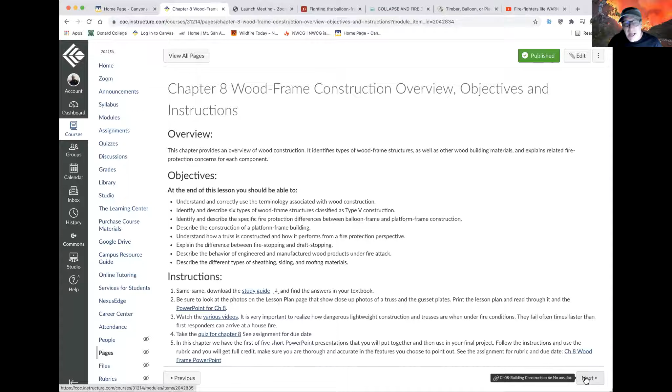So here, I'll just go through it real quick. Here's the objectives and instructions. There are a lot. I know sometimes you guys hesitate to watch the videos, but they're really informative and will help you understand this subject. So I highly recommend watching the videos.

So there's your instructions, make sure to check that out. Here's your questions. And then I've got 3 PDFs that I put in. And I wanted you to see this one especially, and I'm gonna bring it up a different way in just a sec. Well, you know what, it's probably just fine here.

So this table is based—there's a similar table in the building code—and it explains what's involved in the 5 different types of construction. And by the way, they all have 2 subtypes, except for type 4, which does not have a second subtype, and type 2, I'm sorry, has a 3rd subtype.

I didn't know that. Oh, I see, that's NFPA, according to NFPA. But in the building code, I think type 1 has 2 types, type 2 has 2 types, type 3 has 2 types, type 4—and then type 5 has 2 types. So what makes a type 5, a type 4, a type 3, a type 2, a type 1?

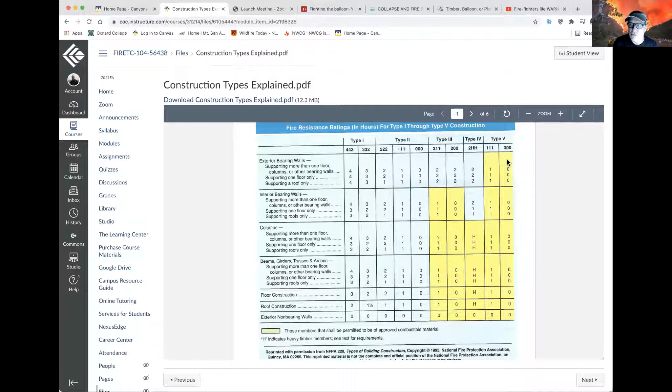So what does it mean when it's a 1-hour rated wall or a 2-hour rated wall? What do you think? There's a lot of crickets out there. Well, I'll tell you—are you still alive? Can you hear me? Yes, yes sir, okay. I just wanted to know you're all still there, I'm not hearing anything.

A 1-hour rated wall really won't hold back a fire for 1 hour, but it's a rating that's supposed to act like it would hold it back an hour. So a 20-minute door is supposed to take 20 minutes for fire to burn through it. A 1-hour wall is supposed to take an hour to penetrate through, but it's less than that. It's kind of like a 2x4—there are no true 2x4s out there except really old ones, they're all less than 2x4, but they're still called a 2x4.

So a 1-hour rating is supposed to slow a fire down at 1 hour. A 2-hour rating is supposed to take 2 hours to penetrate through the wall, and 3 or 4 hours similarly. So a 4-hour rated wall is usually steel encased in concrete, or concrete alone.

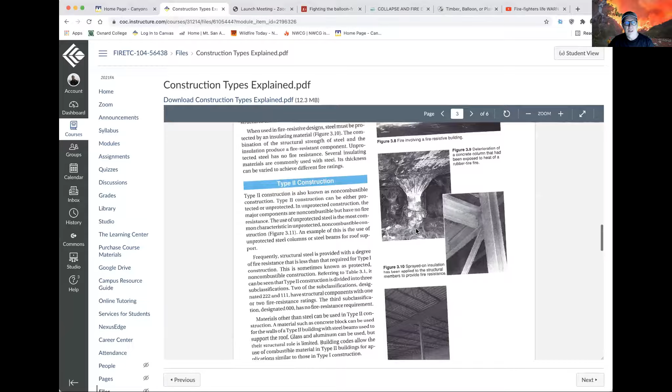Yeah, so here's some pictures. This is steel, and there's a sprayed-on insulation, can you see that? So here there was this great fire, but look, the building is still in pretty good shape. It's fire resistive, so it's charred from the smoke, but the building is fine. All the furniture is a disaster.

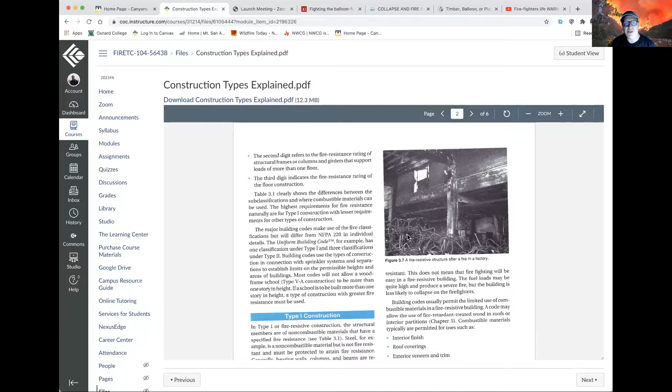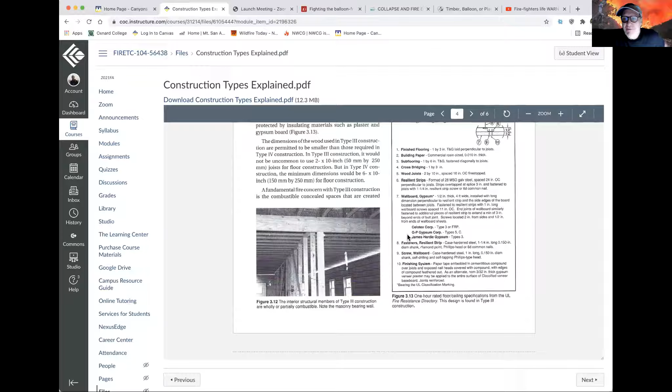The First Interstate fire was one that burned pretty wild and crazy in downtown LA. Minimal damage to the building—it was all contents that were burning. Whereas type 5, which we're going to talk about tonight, is the exact opposite.

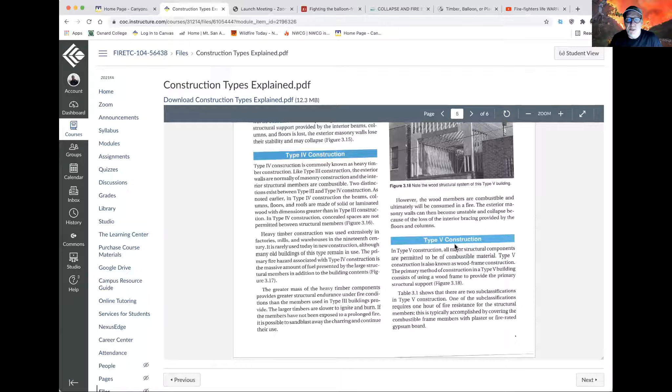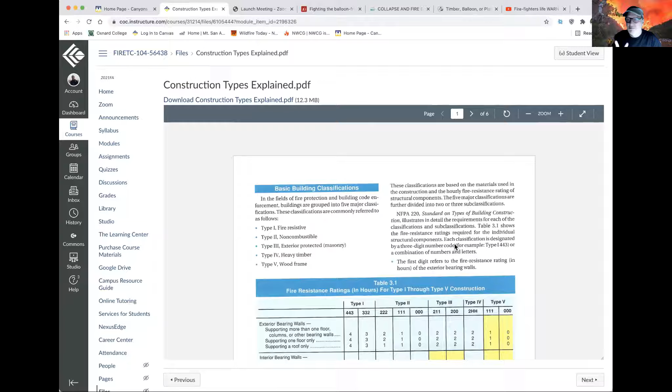Okay, so I want you to read through this, these descriptions here, similar to what you get in the book, but very simple and to the point. That's one of the reasons why I put this here—in 6 pages, very easily, all 5 types just explained. Okay, oops, I didn't have to do that.

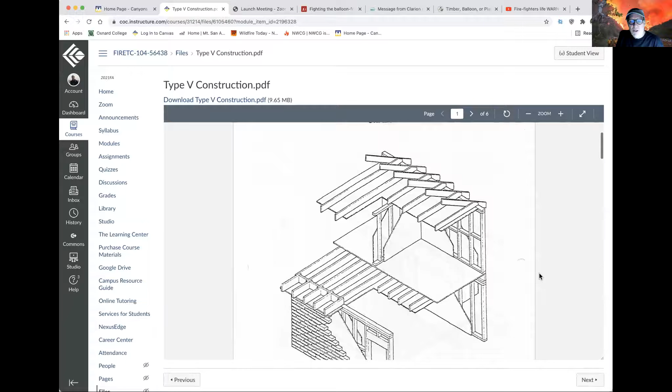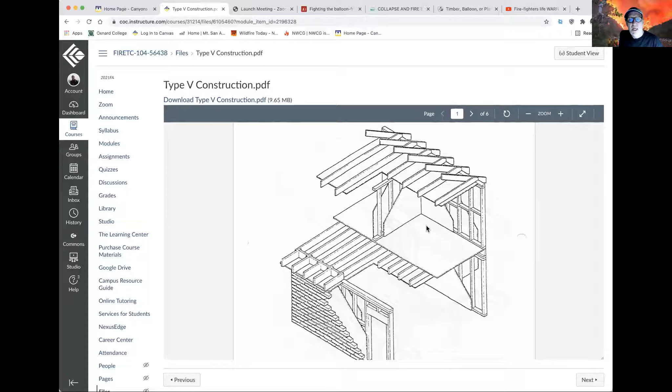Then this other one I want you to look through is about type 5 construction. So today and this week, you're learning about wood frame construction, type 5. Most of us—there might be a few exceptions out there. Some of you maybe live in apartments that are type 3, or you might live in something, though I highly doubt it, that's type 1 or 2, unless it's high rise, and we don't have any high rise in Santa Clarita. Most of your homes are a version of type 5.

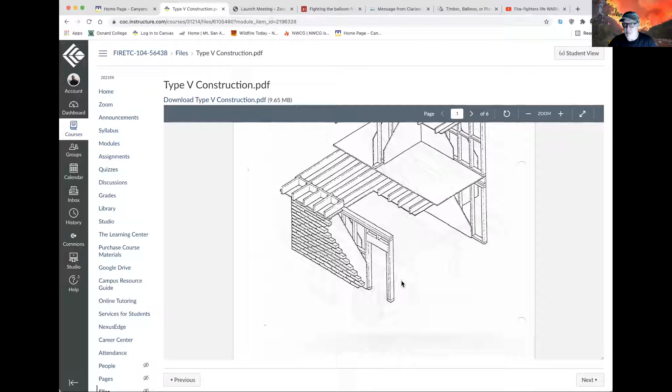This is a very typical drawing. This is a platform style construction, type 5, which means it's predominantly wood. Now sometimes, and they deliberately included this picture, you'll pull up on a type 5 building but it looks like it's a brick building. There are a lot of homes here in Santa Clarita, especially some of the bigger, higher dollar homes, that have a brick or rock look to them. But this is a facade—it's not really the structure. You can see here there's some kind of gypboard in between, and the brick is just there for looks, it does not hold the building up. If the exterior of the building really was brick, it would be type 3.

They get confused, and it's really important that we know the difference between type 3 and type 5. As we look at the 5 types over the next 5 weeks, one of the things I want you to learn is, what's the hazard? Because there's pros and cons to every type.

It's just like I mentioned with truss. Trusses are used a lot in type 5. The truss for roofs or floors, they are used for a very logical reason. They're inexpensive and they're light, way lighter than using heavy timber. So there's a positive to that, right? Our homes would cost a ton more if they didn't use trusses.

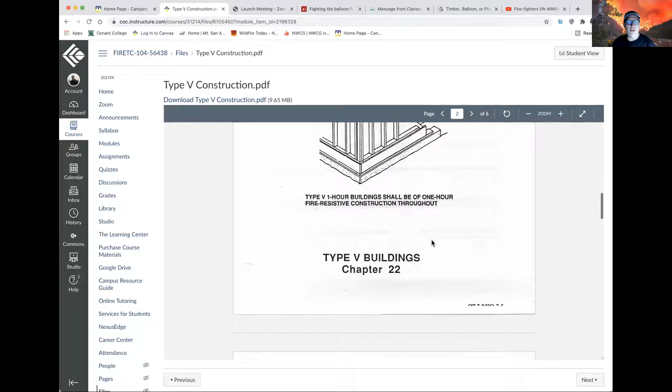But the problem with trusses is that they fail very early in a fire because of how short the gusset plates are. Did we talk about that yet? Anybody know? Did I talk about trusses and gusset plates? Yes, sir. I thought so. I have some pictures in here that you'll see of how short these gusset plates are. They're like a 1/2 to 3/4 inch. And then imagine a nail that's only just 1/2 inch. Are you going to put a lot of confidence in that?

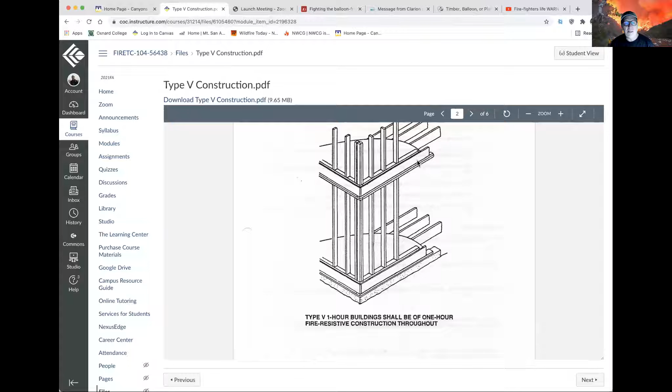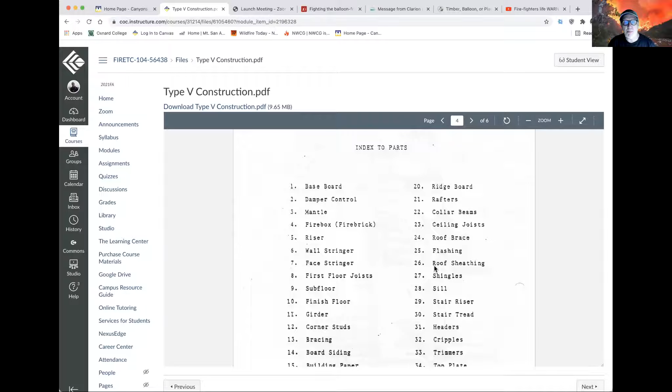No, not really. So here's another illustration of type 5. Here's the joists of a floor and sill plate and the basic framed structure. This illustration gives you all of the terminology in a wood frame construction house. Here's the list of the parts that correspond with these numbers, okay? So that will help you if you're reading and you're going, what the heck is a tread on a stair? Or what's the stringer? You can find that out.

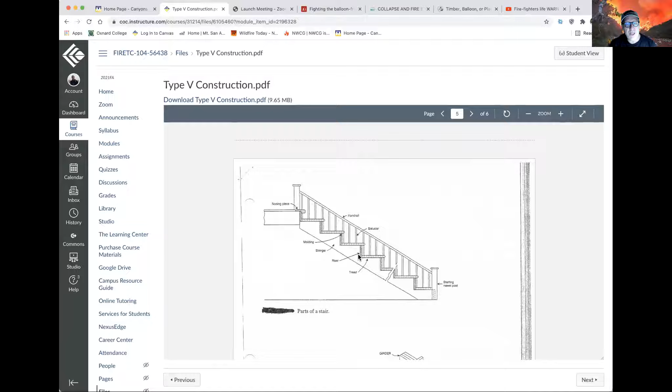And here's another illustration because stairs are so important. Stair failure kills people. Stairs is a really frightening part. We do not allow in any commercial setting to store anything under a stairwell because of fire spread. So this gives you all the names: the newel post, the balusters, the handrail, the tread, the riser, and then the stringer. Parts of a stair, this is the opening of a stair, has to be built correctly where it's going to pop out into the second floor. You put a lot of confidence when you're walking upstairs, and having one collapse would be really bad.

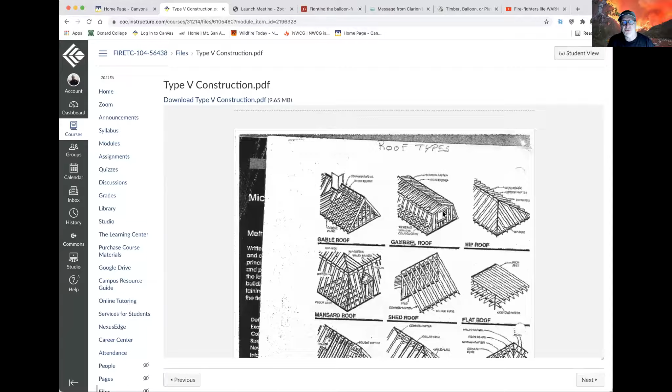The last one is roof types. Now there is an extra credit assignment - you can go straight to assignments and find it. If you see some of these different roof types, take a selfie of yourself with that roof in the background, upload it, and say, I found a gambrel roof, or I found a mansard roof, or I found a shed roof. These are all different roof types. And in fact, there's an even better illustration in this next PDF, and I like that it's color, it's a little easier to tell.

Pyramid type hip roof. One of the ones they don't have in here, but I think I've got it somewhere else, is Sawtooth. Sawtooth is rarely used anymore, but it used to be used. There is one here in town at Cal Arts. It was used in big warehouses. The roof would go up and then straight down, up and then straight down, up and then straight down, so it had this look of an upside down saw.

The part that went straight up and down had lots of windows, and so it was a way of adding light into buildings. Also, they could open the windows and it helped with ventilation pre-air conditioning. So there's one of these Sawtooth roofs off the 5 near County General Hospital. So when somebody else is driving, you can look and see if you can find that Sawtooth roof - they're very rare to see. But like I said, there's one at Cal Arts. You can go over there and see if they'll let you in. They won't, but okay.

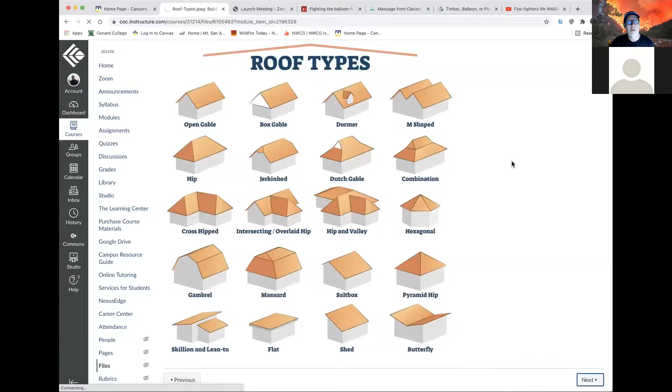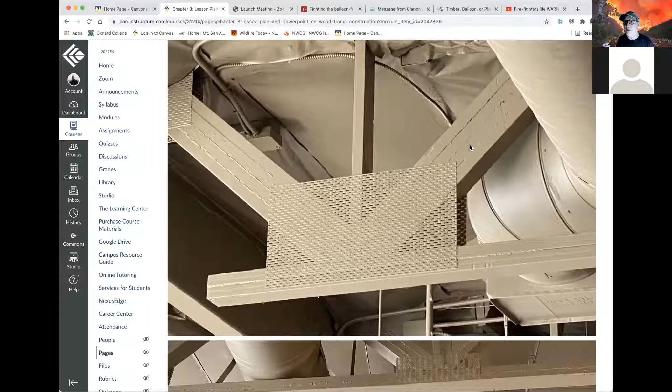And then here's the pictures of the trusses. This is called a gusset plate, and these are trusses, and they're often used for floors and for roofs. So this one was part of, it's a flat roof, and it was part of the roof structure.

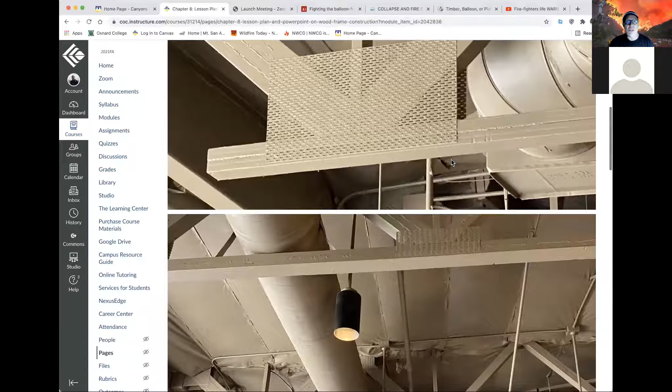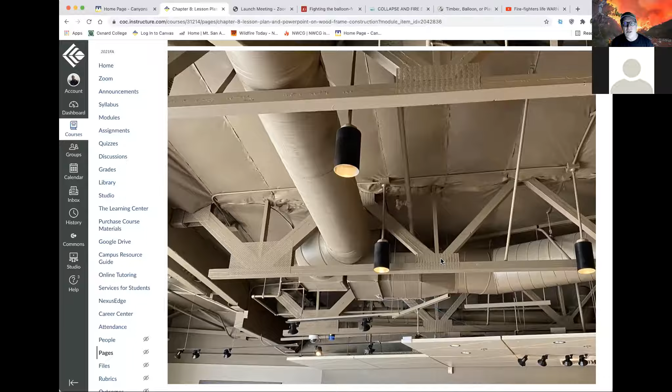And you can see how big this gusset plate was because these were big members. And then some of these other gusset plates aren't as big. See, here's that big one in the distance, and here's the others. So bigger beams, bigger members, bigger gusset plates.

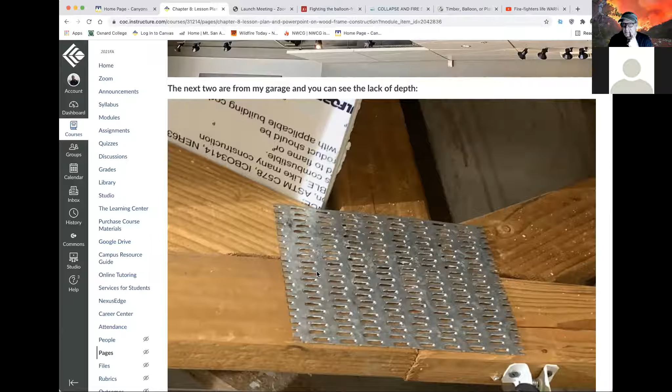So I wanted to get a close-up of a gusset plate and wanted you to be able to see that. So this is in my garage. And so you've got 1, 2, 3, 4, 5 members that are being joined by this simple gusset plate. And I think there's one on both sides. I'm not 100% sure, I'd have to go back out there and look. But I took this picture.

Yeah, see, it's on both sides. Because here you can see this is what holds it to the wood. And you can see it's a ½ inch, maybe 3/4 max.

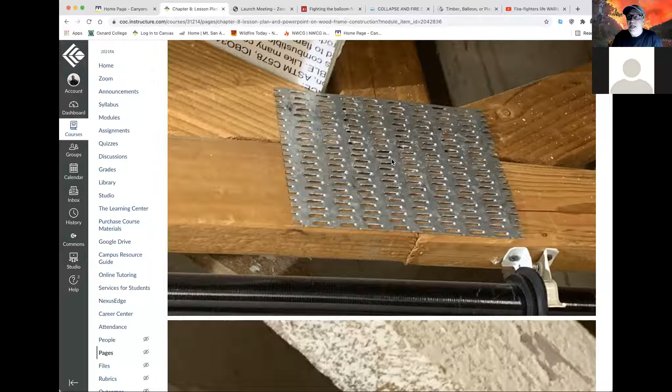And those bite into the wood and hold it together. Now that's adequate as long as it's not exposed to heat. If you have fire in here, this baby's gonna heat up, and through conduction, it's gonna transfer that heat into the wood and it'll char. And this is usually where we get failure, where there's gusset plates, okay?

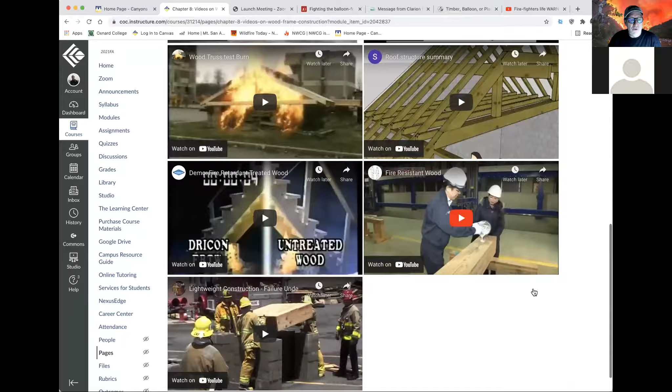So those were the things I wanted to show you in the module. Here's some of these great videos, a lot of really good informative videos. This one's a little old school, but very good information.

This one's about roof structure, but this one's pretty interesting. And it's a wood truss test burn. A little unrealistic because it's outside. You're getting more oxygen, but on the other hand, the heat isn't being totally held inside. So maybe a little bit off on how fast, but it goes in about 5-6 minutes.

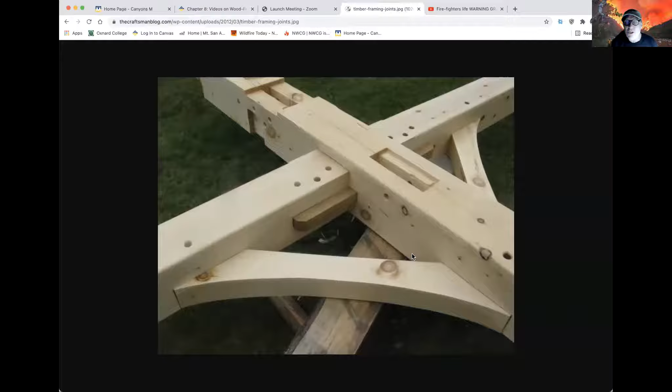Okay, that's enough of that one. I just wanted to show you some good stuff. So here's 3 different photos. Well, I think I can make that bigger. Yeah, look at that. So this is timber frame, used a lot in old barns, but it's kind of made a comeback. People are wanting to get that old organic look to a home, very earthy. So in timber frame, the walls are just kind of hung on the frame.

And so they have what they call bents, and this is part of a bent. A bent would be, if you look down the long part of the building, you'd have bents spaced throughout going the width. So the bents are the main structural members, and they're usually heavy beams like this.

In the old barns that are using old growth logs, a lot of them still have been hewed. You can still see where they were hand hewed with axes or those like mattocks, things, I forget what they're called. They would do this by hand back in the old days.

We have machines to cut tenon holes and to help you cut tenons. So this is where a tenon will slip in there, and then see this little hole — I just used the wrong term. The thing that slips in is different. The tenon is the little rod that goes in there, I think. I forget, my terminology just got a little messed up. But these, so they put the little tenons in, post and tenon, and I can't remember that third word.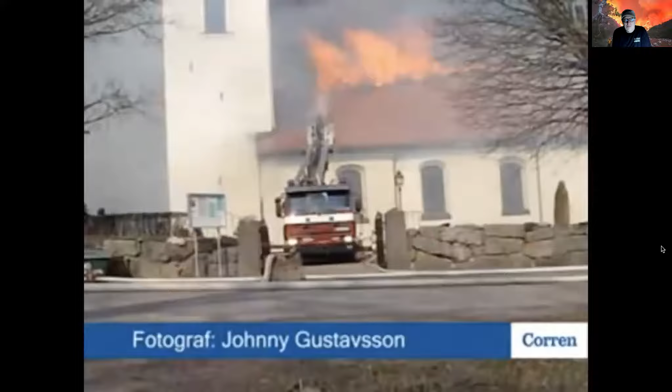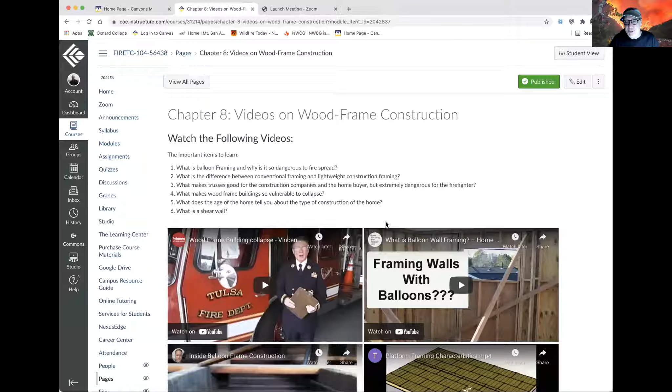So some of those different building collapse during a fire. Scary deal, right?

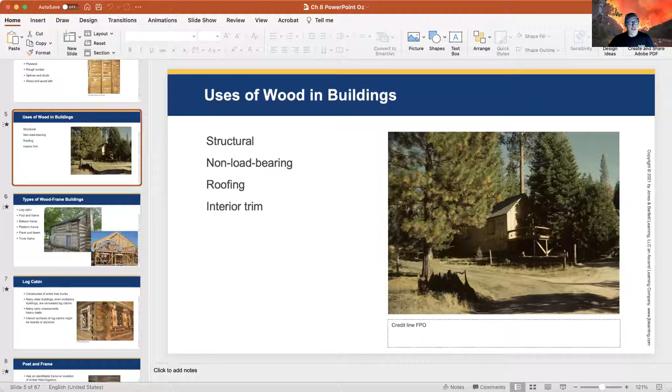So there's different kinds of ways we make wood frame buildings. And I said there's 3 basic, but there are a few more categories.

Well, there's the old log cabin. We don't see too many of those around here. There's a few in some historical sites, but back east you do still see them. People live in log cabins. And as I was saying earlier, they've kind of become a hip thing to rebuild with modern conveniences. This one's in pretty good shape, actually.

But I want you to notice something. Have any of you taken fire prevention with me? I am teaching it during the winter session. If you haven't taken 102, I think you would like that class. Though in winter session, it's a blitz, it's even more intense than summer school.

So look at this, a wood chimney. They cake it with mud or some kind of material inside, like chinking, and they have to keep doing it because it gets brittle and breaks off. Wood chimney fires were very common. A lot of times when I tell people they used to make chimneys out of wood, they're like, are you kidding me? Come on, you're pulling my leg.

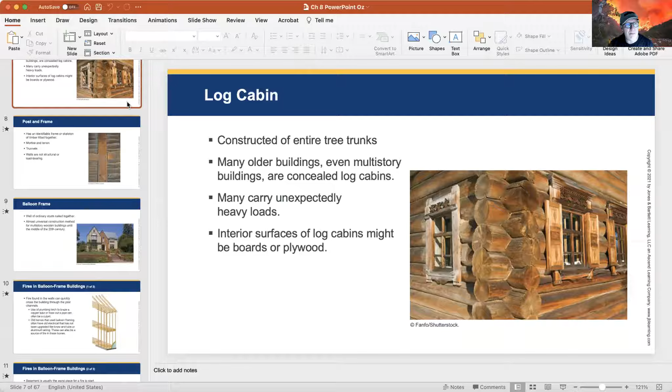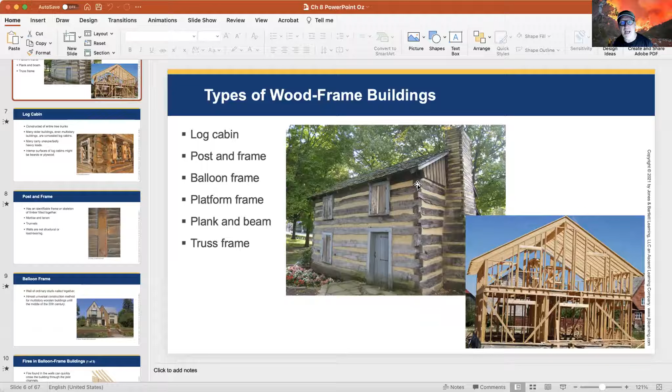So log cabins, like I said, not real common anymore, but they were used, all these joints, they would join them together and then chink them. This kind of log cabin, like the old Lincoln logs, very uncommon. More often you have something more like this. All of these cuts are made to repel water so that the wood doesn't decay at the corners.

So post and frame has a very identifiable frame and skeleton using the mortise and tenon I was talking about earlier. The other word I couldn't remember is trunnels, that go into the mortise and tenon. Walls are not structural, they are not load bearing. The bents are the structure, and everything just kind of hangs on them.

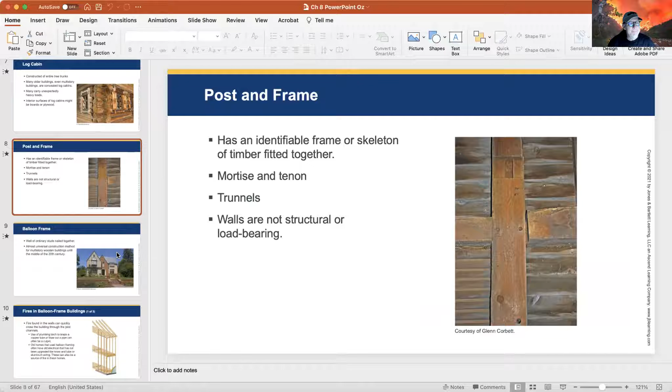But they also, a lot of them have knob and tube or aluminum electrical. And if they have not been updated, these kind of houses, people buy them all the time thinking, oh that's so cool, we're going to redo it and have this wonderful old house, it's a Victorian or whatever. And they don't realize they're buying into a nightmare, because usually, if it hasn't been done already, you have to change all the electrical, all the plumbing.

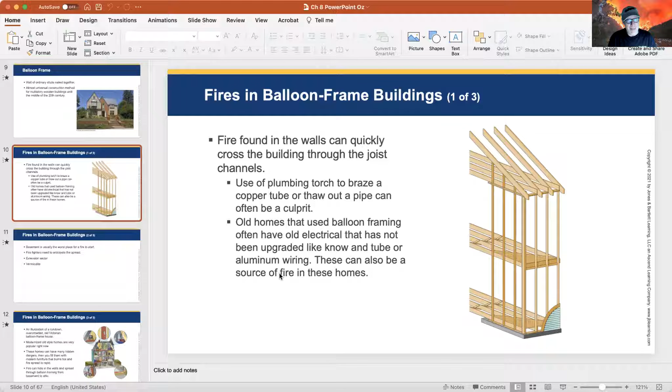So fires happen quite often in balloon frame and have rapid spread. That's the thing firefighters want to be thinking about with balloon frame. They're usually pretty structurally sound, but they have rapid fire spread in the walls and the floors.

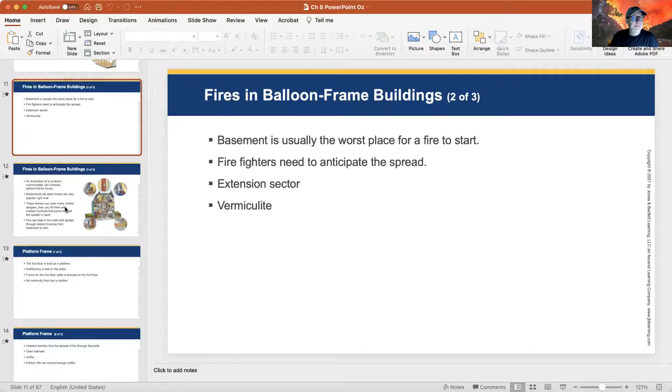We get all these modernized old style homes, Victorians, very popular, but they can have all sorts of hidden dangers. Back east, they have radiators. Where you have radiators, you have to have a boiler. Boilers can be a problem. You have issues in the walls. Oh, and by the way, if the rats get in the walls, they can travel the whole house. They just love it. It's like a highway for them.

But here's the deal. What's inside, when we modernize them, we put all of this really highly flammable furniture that burns extremely hot. So all of those things, when we modernize these old homes, if we don't add the fire stopping, if we don't change the electrical, change the plumbing, and be careful of hidden fire dangers, then it can be a nightmare.

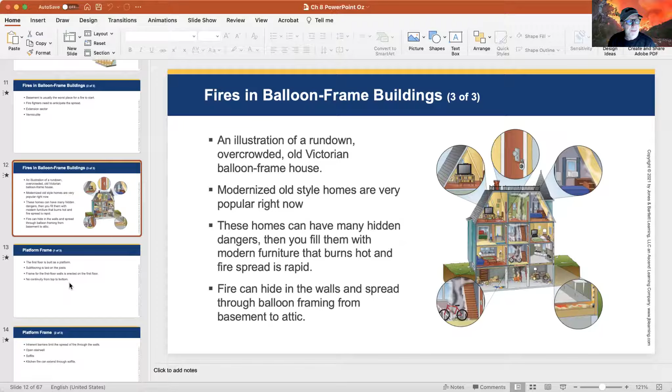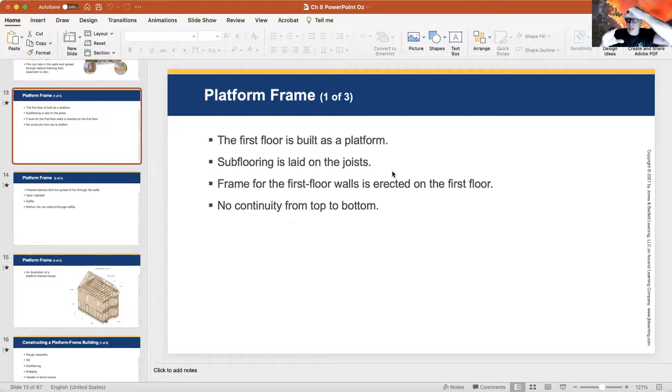Platform frame is what we have a lot today. First floor is built like a platform, then you have subflooring, and then you frame above that on the first floor. And there is no continuity from top to bottom. Each floor is like a box put on a box. And that's kind of good. There's some good things to that. There are some inherent barriers to limit the spread of the fire.

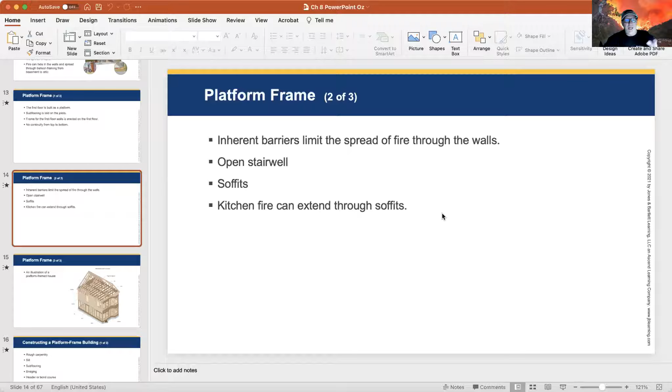But if they are multi-story, they usually have open stairwells to deal with, depending on how they've made the floors. If now in modern homes, they're using the trusses, there's plenty of room to get your utilities through them. But if not, a lot of times they'll have these soffits and spaces where you can run plumbing or ductwork and things like that through. And sometimes those can offer fire spread vertically, laterally, or horizontally.

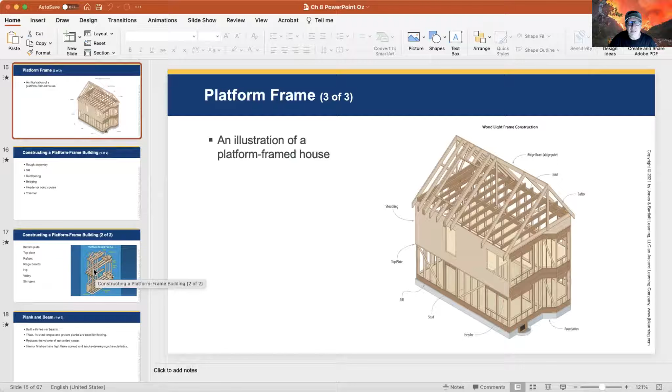So here's an illustration of a platform framed house. See how it's kind of just a box on top of a box, and even the roof is just like another box put on top of the box. It is an efficient way of building a home, and it's more cost effective. However, now with truss frame, it's added a dimension that makes it a little more dangerous for us, a lot more.

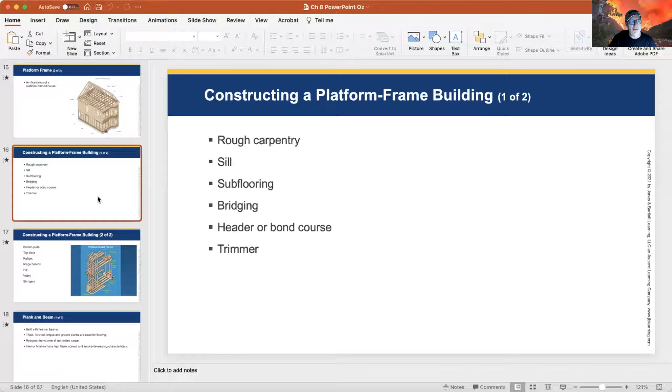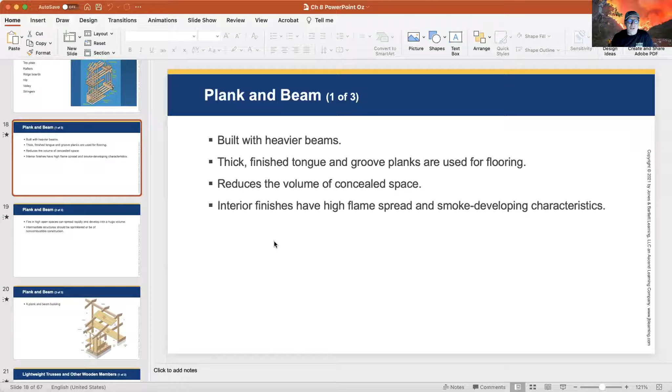So you can look at all of that later. Plank and beam is built with the heavier beams, thick finished tongue and groove planks for the flooring, and it reduces, so you don't have like a space in between the roof or the ceiling and the next floor, but they'll use those planks, which serves as a pretty ceiling and a pretty floor. So it reduces the volume of those concealed spaces, but you can have other issues. Plank and beam, again, is kind of expensive.

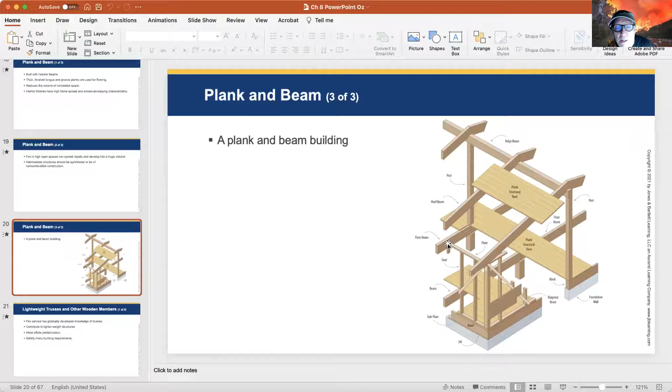So here's an illustration of plank and beam. Beams, a post, roof beam. Again, take your time, look through this, and the book will explain it in better detail than I'm doing.

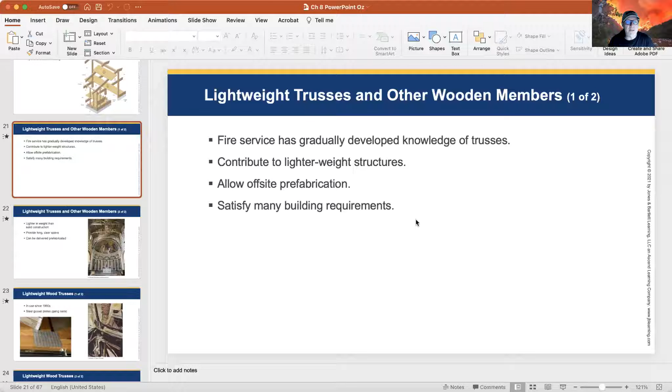Okay, so now we're to more modern times. What we're going to see, if you were a firefighter in Santa Clarita, unless you went to a mobile home fire or to an apartment building that was built as type 3, residential fires that you would go to in this district would almost all be lightweight construction, platform, lightweight trusses, and other wooden members. So as we're getting to know them and understand them better, you just got to think about how long has this fire been burning intensely?

Because as the fire builds up, those trusses are going to start to fail, and all it takes, because the triangle is dependent on all three sides, one side goes, the whole thing goes.

Trusses can provide these great long spans, which is great. Isn't that a beautiful church building? Probably Greek Orthodox or some kind of Orthodox. It's a beautiful building.

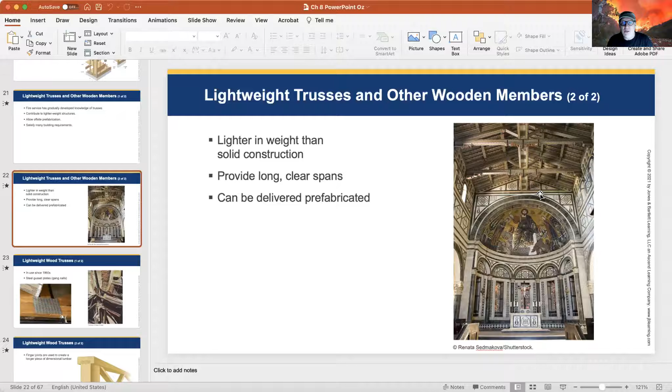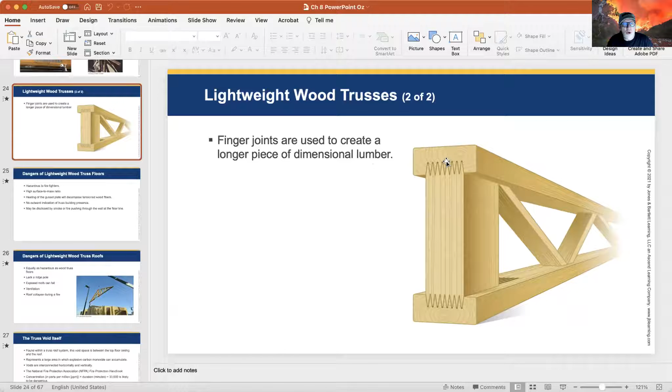So they started using lightweight trusses around the 1960s. This guy came up with the idea. He was both a builder and owned a lumber yard, and he was trying to think of a more efficient way and more cost effective, and he came up with these ideas. So sometimes trusses that are used for floors will use these finger joints. The roof trusses are the ones that use the gusset plates more, but they do use them in the floor joists as well.

So, well, what's the big deal? So if it's more economical and all of that, well, it's hazardous for firefighters, because as we saw with the captain from Fresno, they can fail rapidly. That fire probably was in the 5 to 8 minute range from the phone call to him falling through the roof, right in that zone. I've never researched that part of it, but those gusset plates heat up and it decomposes the wood. And that's where the failures often happen.

The most important thing is you recognize this is a residential building. The captain is going to give a size up: residential single family, type 5 construction, looks like wood frame truss building. They say things like that to help give you clues.

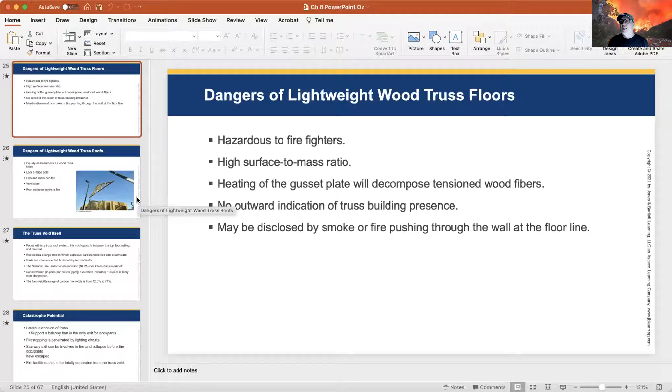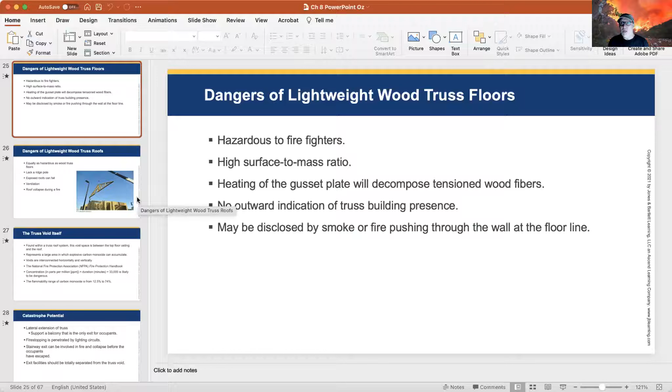When you go up on that roof, you do an inspection hole and stick your hand in there to see what kind of roof it is. As you're working your way, you're looking for more smoke. You do little cuts, called kerf cuts, looking at the intensity of the smoke and maybe flame coming out. Then you know, okay, this is where we're going to cut our hole. We're not going to go any further.

So here's a great picture of a truss roof being installed. This is another great thing about them: you bring a crane, place them on the roof, and you can have a whole roof put in place in a day, which is really fast. They don't have a ridge pole.

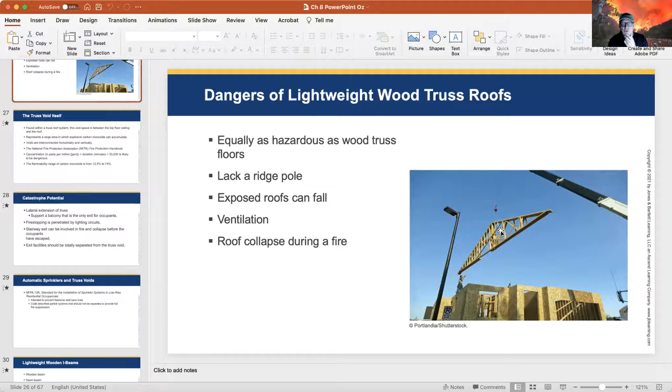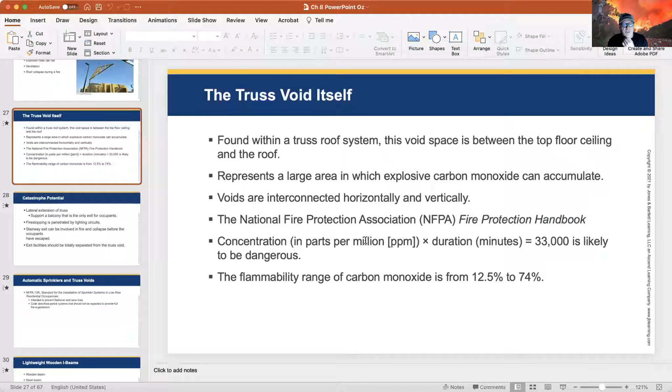Roof collapse is very common. Within the truss roof system, most of them are made exactly the same unless there's some change in the structure. So you've got these void spaces, and it's a large area that can contain carbon monoxide, which is poisonous but also explosive. You can get lateral extension through the trusses, especially floor trusses, that lateral spread.

You're fighting a fire. A friend of mine, a Glendale firefighter, had a close call he told me about. He was working with his crew trying to extend a line in an apartment building fire, heavy smoke, heavy fire. They didn't know it, but it had spread into the floor. They were in an apartment building, multi-story, and there was fire underneath them as well as on the floor they were fighting the fire on.

Might have been a basement, but I think it was just another floor below. He's extending the line with his crew, and they came upon something in the way that he thought was a television. It did turn out to be a television that had fallen off the wall. So he went to step over it, and something inside him said, check it first. So he took his axe, and there was nothing there - the floor was gone, it had burned through.

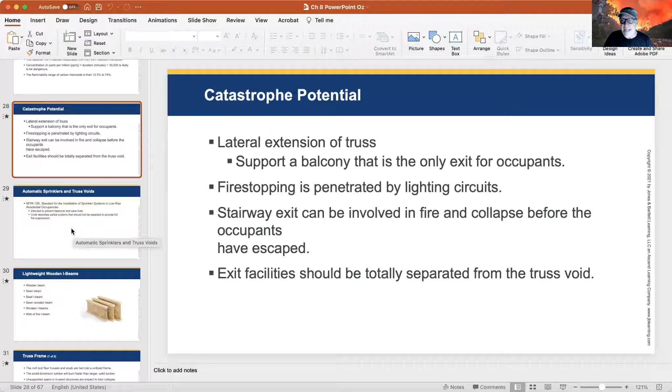So you can get this extension through the floor, so they backed off and decided to fight the fire from a different direction. Stairway exits can be involved in the fire and collapse before occupants have escaped. The stairways become, because they're open, like a chimney.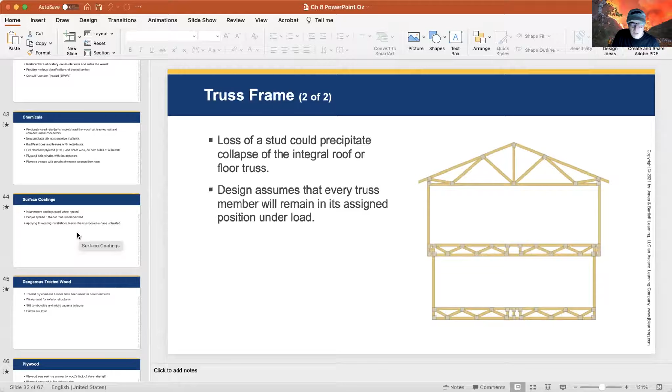I want you to look through a lot of the rest of this. They do talk about fireproofing - it makes wood more fire resistant, but there's no such thing as fireproofing of wood. All those chemicals and retardants wear off with time, and they will slow a fire, but they don't keep a fire from happening.

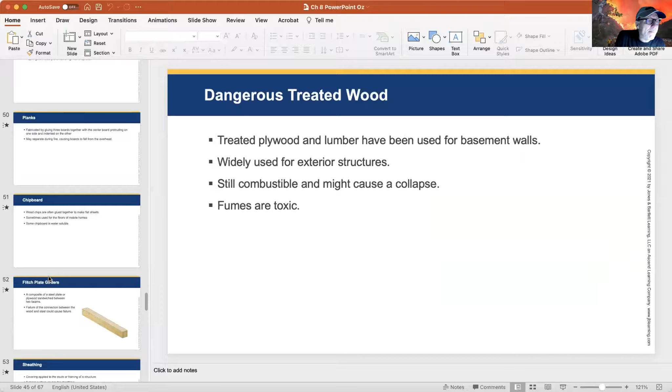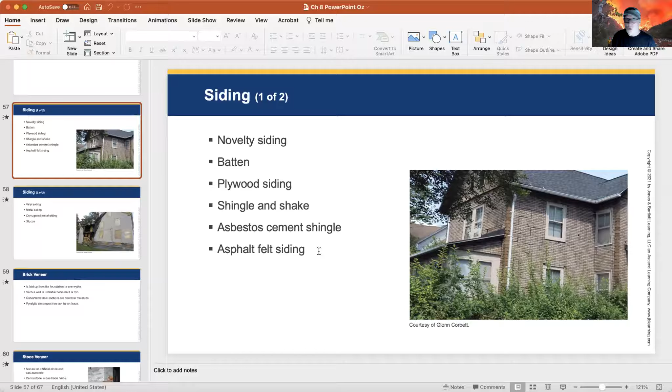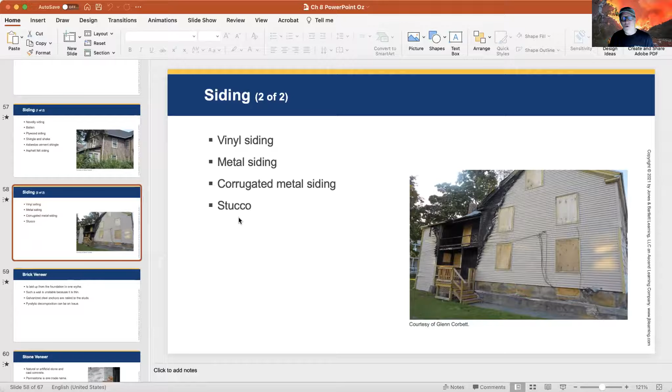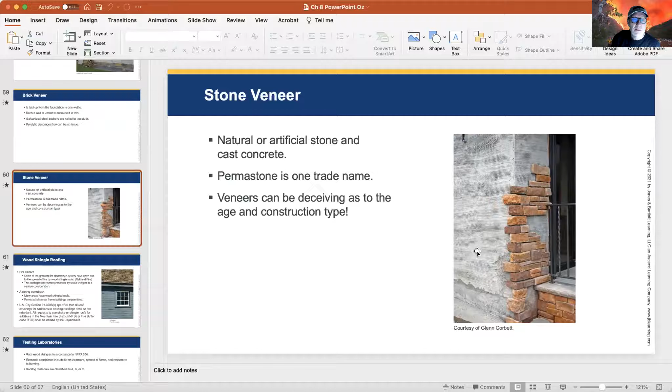Wood shingle roofs are pretty much gone in California. We've made them illegal. There's still some out there, but very, very rare.

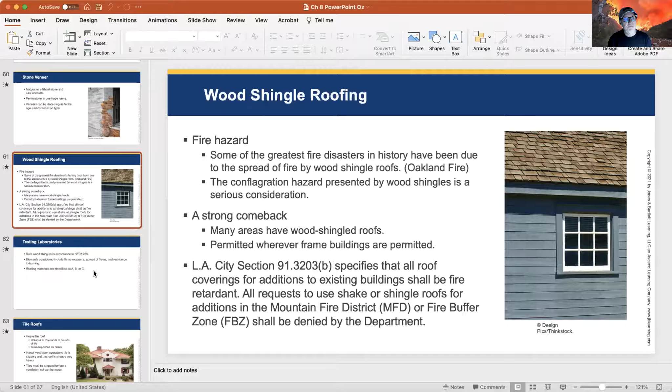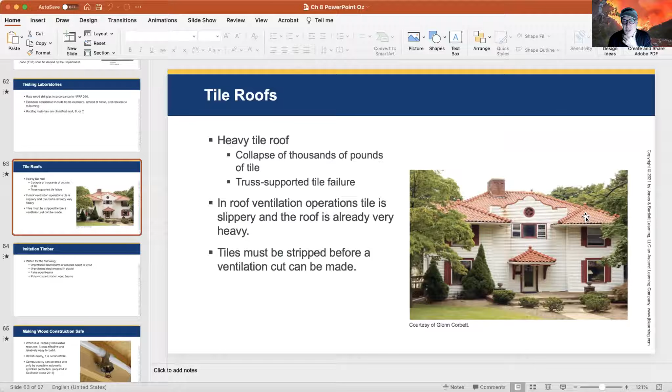Roofing now is kind of a big deal. Tile roofs are a little hard to cut your hole because you got to pull the tile first. They're heavier, they put a heavy load on the house, but they're a great look and very good at protecting your home. But what's become really popular is metal roofs.

These metal roofs can even look like shingle or look like tile. So you can go up there thinking you're going to cut a hole, but you've got to have a rotary saw with a metal blade to get that out. Or sometimes, because they're interconnected, you can use your axe to get under them and pull them up. It's a lot more work. It's not just going up there with a chainsaw and cutting a hole.

Let me see if there was something else I wanted to say. I'm looking through the chat. David, what did you say that has a 2 hour before it burns down?

That's the first question you asked about how long it would take a wall to burn. Yeah, like a 2 hour safety rating, 2 hour safety. Okay, so you put it here instead of saying it out loud. Yeah, that's basically it.

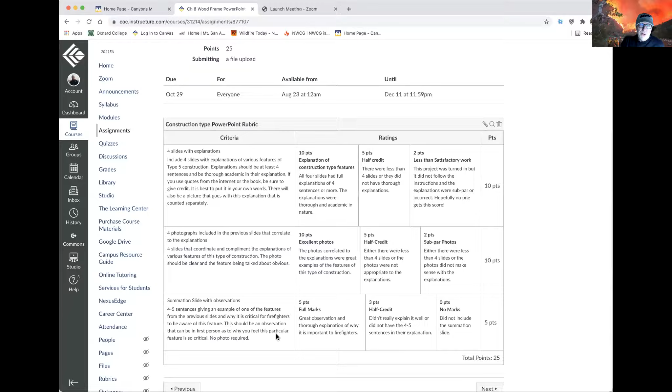Here's the rubric, very simple, okay? And it sounds like we're doing a lot because we're doing these for the different types. But remember, you're doing your final project in bits and pieces, and you'll just love me that last week when you have tons of assignments in other classes, and all you got to do with this one is just put it together.

Take all those PowerPoints you already did, take out the title pages of each one, create a new title page, put them all together. If I made comments on some of yours, like some of you just seem to think that it's okay to say this is an example of wood frame construction. Well, how is it? I want to know more. I want you to say stuff.

So this gives you all the instructions. There's going to be 6 slides in this one: a title slide with the construction type, your name and my name. Then 4 slides, and on that 4 slides, each slide will have 2 things. You're picking various distinguishing features of this construction type. That's up to you, you pick the things you think are important to know about when talking about wood frame construction.